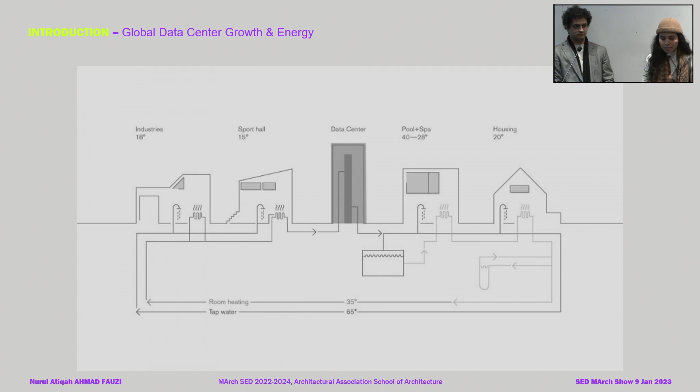Despite these demands and energy concerns, some data centers have a good relationship with their cities. They make up for their huge energy appetite by channeling their residual heat to neighboring buildings. So this is exemplified by this diagram by Norwegian architect Snohetta for one of their data center projects. So Amsterdam also has a symbiotic relationship with their data centers. However, heat demand from the city cannot always be met by the low supply of residual heat from data centers in winter. So we go into my research agenda.

So the entire research is centered around this data center, the Equinix AM4. I'll be calling it AM4 from now on, by Benthem Crouwel Architects. It is one of the most celebrated data centers in the world, despite adopting the shape of the prevailing box typology. It also challenges the idea of data centers being invisible, as infrastructures tend to be. This windowless behemoth has succeeded in gaining acceptance in its city. However, like other buildings, it is subject to obsolescence.

So enter the quantum computer. Based on numerous articles, once fully developed and ready for the market, current data centers will not be able to cater to the needs of the quantum computer, which runs at a temperature of absolute zero, which is minus 273 degrees Celsius. So this advancement will render AM4 and other data centers alike obsolete in about 30 years' time. So this is the future scenario that I've adopted for this dissertation.

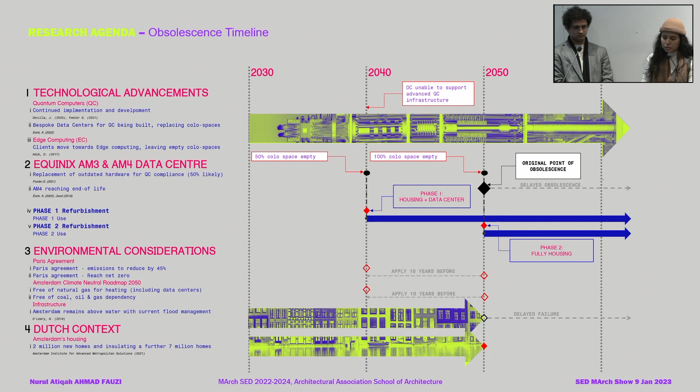So this obsolescence timeline, I call it, aids in shaping my research objectives, particularly concerning the proposition of alternative uses for the data center as it becomes obsolete. This dissertation aims to propose a second life for the sophisticated 21st century data center, aligning with the 2050 European timeline for climate goals and social and economic targets. So leveraging the abundant materials found in data centers, this study navigates the tenets of circular economy to plan the repurposing of the modern ruins as the era of quantum computers begins.

This study assumes a scenario by 2040 where half of the building becomes vacant due to functional obsolescence. Now, Amsterdam's housing crisis necessitates the swift utilization of available space, with data centers emerging as potential solutions for new homes. So AM4 is regarded here in the study as a material bank, housing reusable materials set for disassembly and reassembly elsewhere. In preparation for phase 2, remaining spaces are repurposed into material storage rooms or even a small-scale production yard. No materials leave the site, aligning with the intention to fully utilize AM4's many building elements.

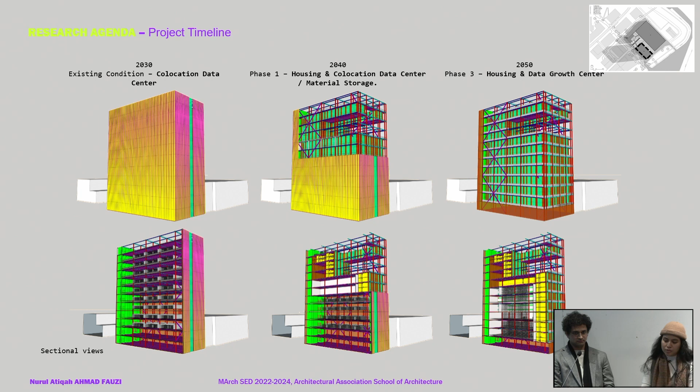Due to its depth, which is about 30 meters, it is not practical for the housing program to take over the entire depth of AM4. However, the residual space holds potential for indoor urban farming and a research lab, which don't require daylight, like its previous server occupants. Incorporating the data farm program not only ensures AM4's continuity as a data center, effectively delaying its obsolescence, but also acts as a contemplative reflection on its historical significance.

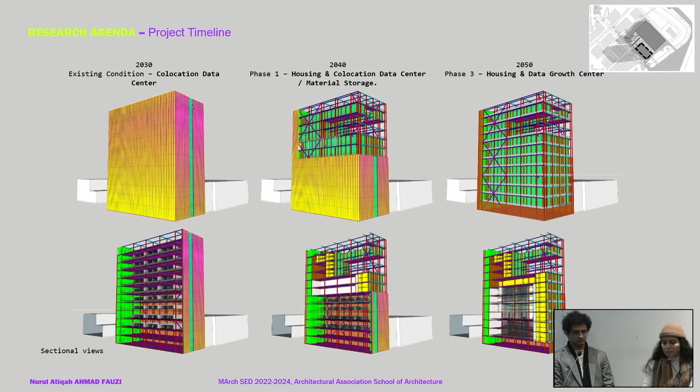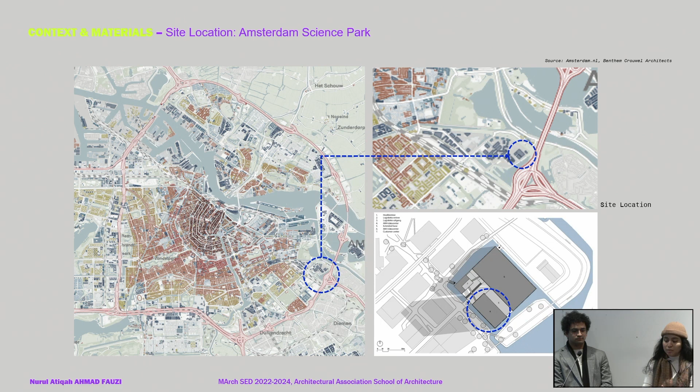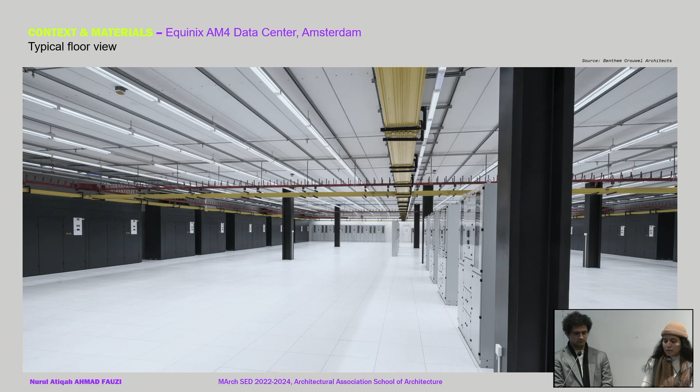So just quickly, AM4 is located in the University of Amsterdam Science Park campus, which is at the fringe of the city. So the staff and the students of the university are the ones who are expected to support the future functions of this retrofit. So this is just a view of the building in its context. It is the tallest building around, so it's not being overshadowed by anything. And much like most data centers, the floor-to-floor height is quite generous. Each floor is 6 meters high and currently houses data servers. And this is just a typical view of really any data center around the world.

So for the purpose of the study, it is important that we establish similar architectural characteristics of data centers worldwide, including materials. The materials chosen to be studied are generally used in data centers and have a lifespan longer than the building's use. So in theory, if the data center in Amsterdam can be fully refurbished into housing using its own skin and bones, other similar data centers can do the same. So the other aspect to take into account is each component's ability to be disassembled easily and reassembled elsewhere.

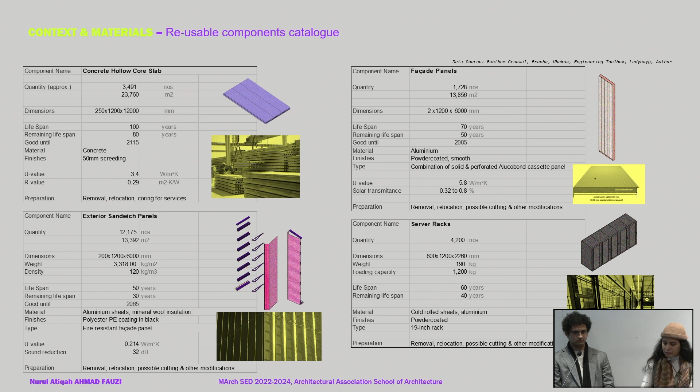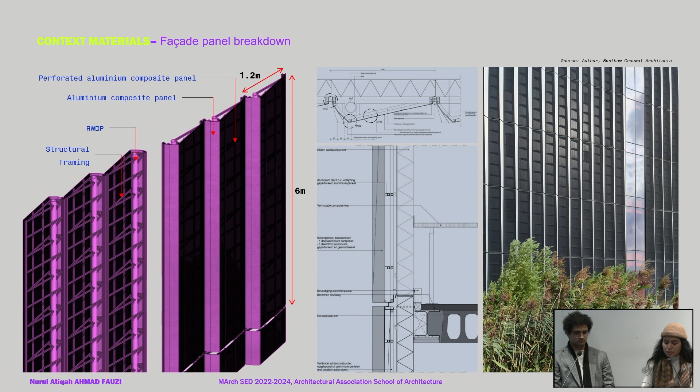This is just one of the few more detailed studies about each material that I've done. So this is an example of the facade panels, which are later utilized as wind barriers and also some sort of shading device for summer.

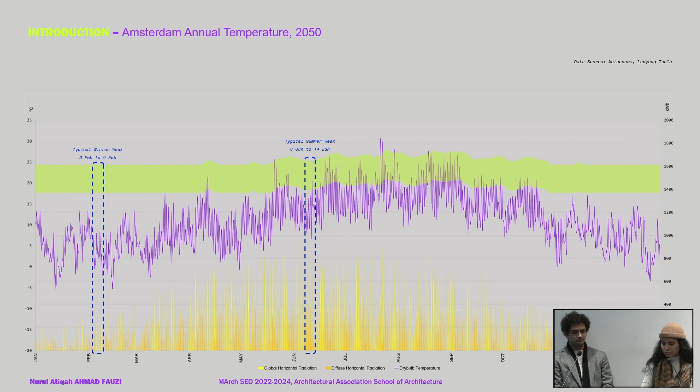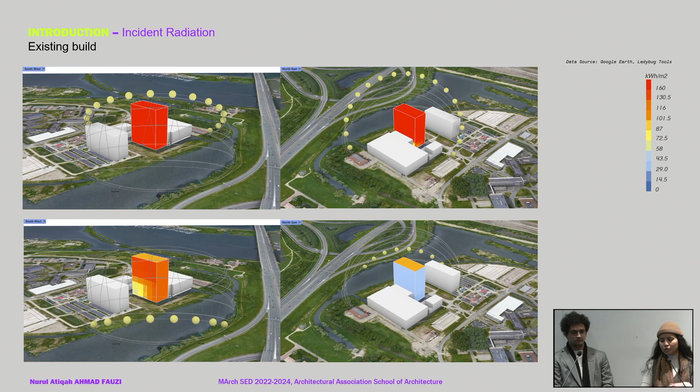So, environmental context. Amsterdam's climate is pretty similar to the UK, with much cooler winters. The southerly facade of AM4 gets more sun, while the northeastern facade and northwestern core receive very little sun in winter. All facades are well exposed to the sun in summer months.

So, layout configuration. The first design task for me was to conceive a layout that works within the structural confines of AM4, and the base case design scheme was, in my opinion, the most obvious route to take. Housing units would line the perimeter of the building with generous windows and depths not exceeding 8 meters. So this is essentially apartments with single aspect units.

The central space would still house AM4's data while it goes through decommissioning and acts as a material storage or assembly warehouse before the final phase. Then the design took a turn where it investigated the possibilities of not being a compact and enclosed building, but instead an open building, allowing more light into the center for the first time in the building's life.

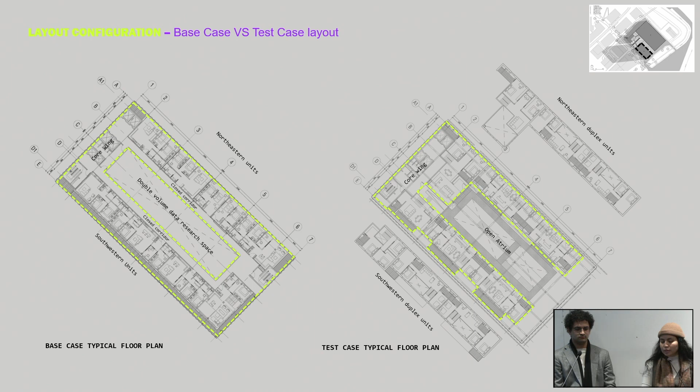This decision would, of course, have obvious impacts on the thermal performance. Compact and closed buildings are always better for heating dominant climates, but I wanted to investigate what would happen if I would propose much better open spaces for the users.

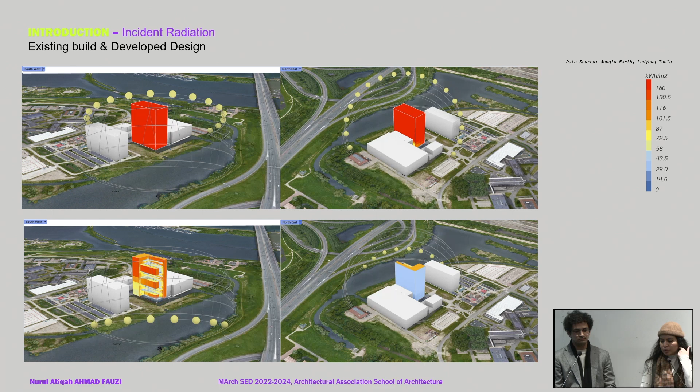So prior to the plans, the design was tested for its solar exposure, and some amount of volume is taken out on the southern side. This development of design also allows for double aspect units and would potentially help the units on the northern side to get more solar exposure.

Just a quick study on housing. These are a few diagrams called housing biographies that trace a person's personal space throughout their lifetime. To summarize, the older a person gets, the more personal space they have. And with scarcity of space in Amsterdam with the housing crisis, it's something that we should consider. Also, the Dutch government intends to rehouse the elderly into smaller spaces to make room for growing families.

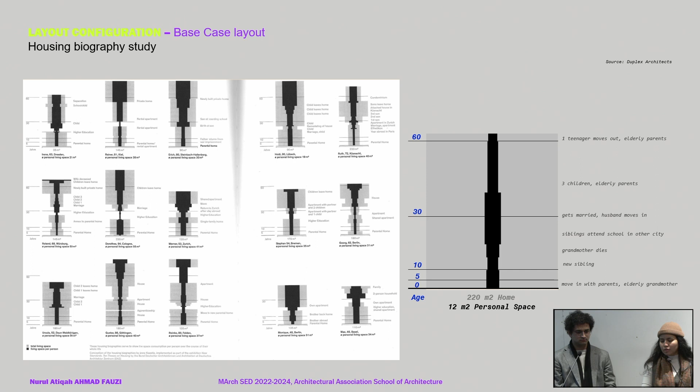So keeping this issue in mind, I've proposed a generational unit to keep future families together and provide the Dutch with bigger future-proof spaces. For the residential units, there is a mix of single-aspect duplex and single-volume units.

Later in the simulations, 2 spaces are tested for environmental performance: the single-volume bedroom, which is only 3 meters high, and the generous 6-meter-high living kitchen. It is essentially a test to compare volume spaces rather than individual units, as we're dealing with the standardized floor-to-floor height used in most data centers.

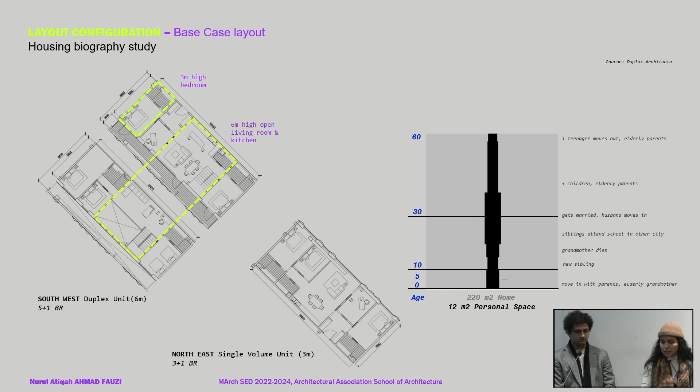The lighting and wind. So just quickly, as expected, a double aspect layout would allow more daylight to enter its units, but winter overcast skies generally keep indoor illuminance levels at a minimum. A quick study prior to this showed that units with a generous window-to-wall ratio, about 40%, perform better in winter, and that is the ratio being used for this study.

Just a quick section showing the spatial arrangement of the open-air atrium and units, as earlier shown. Summer months may provide a bit too much daylight than required, although through conversations with locals, it is always welcomed in Amsterdam. This is where the facade panels come in handy as operable shading devices for the southern units and potentially for northern units as well.

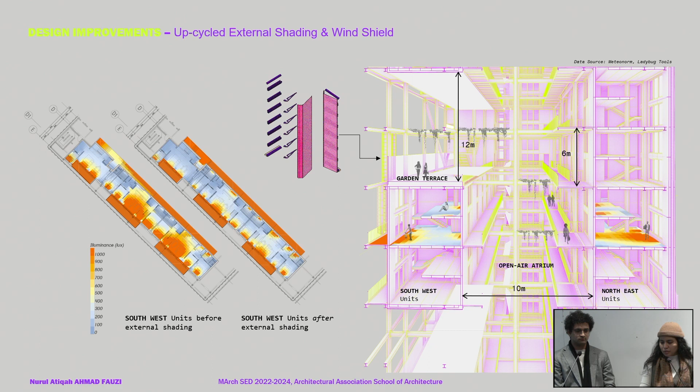Next, we address one of 3 garden terraces proposed in the design. Because the Netherlands is a windy country, opening up the building may increase discomfort levels. So, using the facade panels as not facade panels, putting up a wind barrier at the garden terrace would help create more comfortable conditions in the terraces. So it's reducing the 7.7 meters per second wind to a pleasant 3.5.

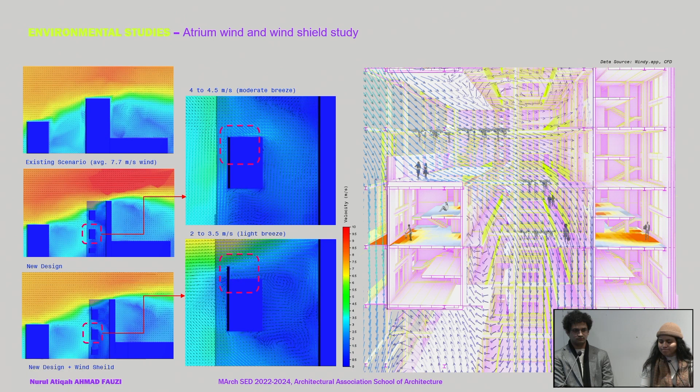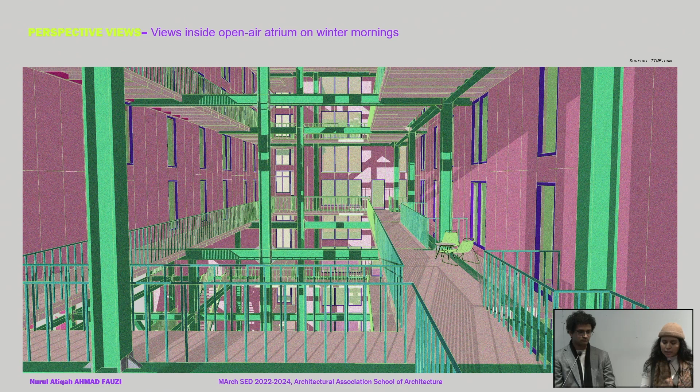So this is where we are at now, essentially what it looks like from the south. These are the southern balconies with the reused facade panels. Some views in the atrium. And these are views looking into the atrium, showing the units which are a bit more shaded. All these renders are actually during winter mornings. So, thermal studies.

So we start thermals with the base case with double glazed windows and existing sandwich panels. So these are the existing units that I am reusing without any additional materials to the existing fabric. A set point of 20 degrees is used since studies have shown that this is the most comfortable for the elderly, since we are proposing generational units.

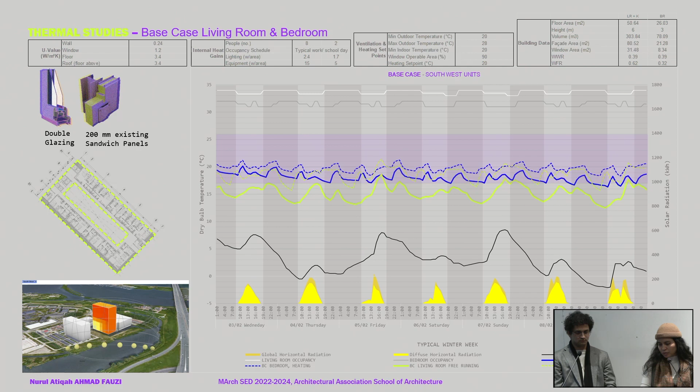In free running mode, it performs below the comfort band, but with a heating set point it climbs into the comfort band. The bedroom appears to be doing well without heating, attributed to its smaller volume. Then we go to the test case, where the building is more open, but with improved glazing and added insulation. And because we are opening up the building to provide better daylight and public spaces, additional materials are added so that it could at least match the performance of the base case.

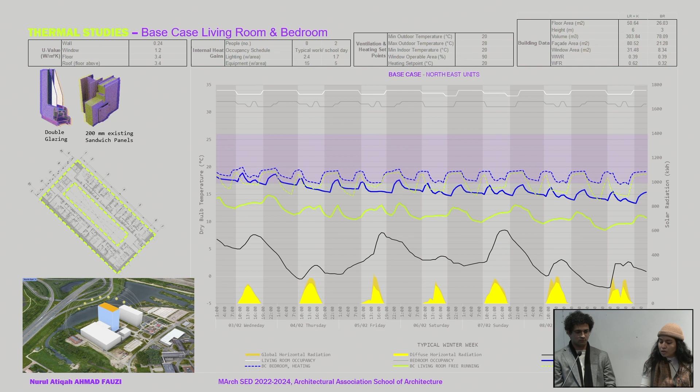So here we can see the living room is still in free running mode, still below the comfort band. So the northern units, I think, self-explanatory. Because it's in the north, it has less solar exposure, so it's not performing as well as the south. This is the same for the bedroom in the north units.

And then when we go to summer, there are periods of overheating in the living room. So these are tested in the southern units. But with the application of external shading, it performs close to a scenario where internal blinds are used. So with these strategies, temperatures in the summer can be kept within the comfort band.

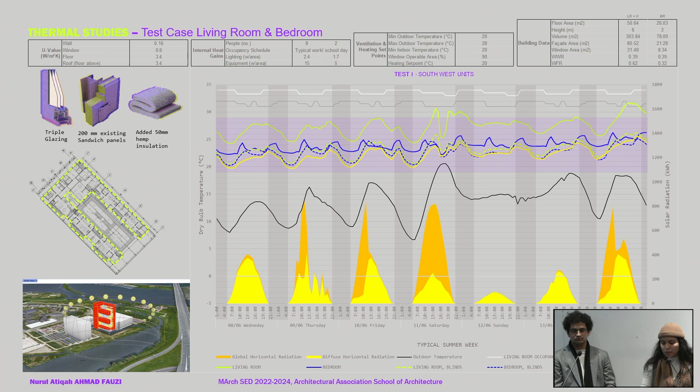So as a summary to my thermal study, at best, the large volume space performs best as a single aspect unit, but with certain strategies, a double aspect unit in a more open building can perform just as well. So all strategies are within the Dutch heating and cooling load requirements, which are a maximum of 25 kilowatt hours. So these two cases are more of options. It's not saying if the enclosed one is better or the opened one is better, but it's really just investigating what kind of layouts AM4 can cater in the future.

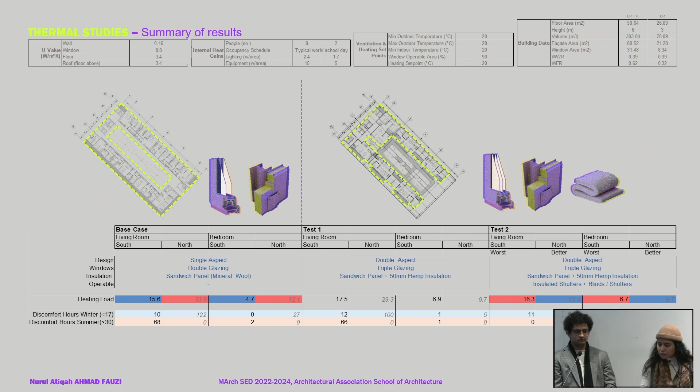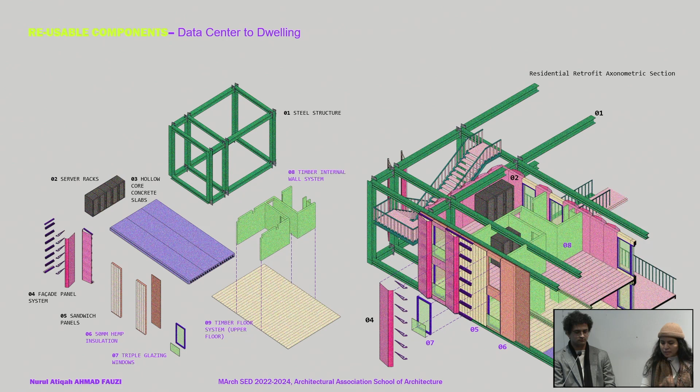Carbon studies. So after being more informed of the suitable materials through simulations, we go back to evaluating the selected components. So from the data center, certain materials have been chosen to be reused during retrofit. All the components are fully utilized somehow or other in the retrofit, but there is 30% excess of facade panels and hollow core slabs that are unused. The excess and additional materials are quantified for the following carbon studies.

So using the FCBS carbon tool, we are able to see how the new materials attribute to embodied carbon of the retrofit. If using the RIBA 2030 challenge, there's room to improve the embodied carbon. So I went back to fully utilizing the concrete slabs as floors instead of a timber floor system, just to see how it affects the embodied carbon distribution. And it has improved enough to get it within the 2030 range. So it's clear how we choose to use our materials affects carbon calculations.

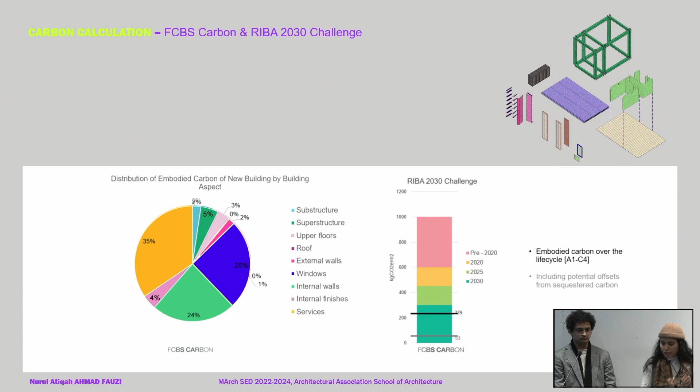And with the same design scheme, the FCBS tool tells us that we have to plant an equivalent of 90 football pitches worth of trees just to offset the whole life carbon values. And I leave you with a thought about how we can go shopping for construction materials in existing buildings. Thank you.

Right, good evening, everyone. My name is Abhilash Menon. The title of my thesis is Factory Reset, Adaptive Reuse of Textile Mills in Mumbai into Affordable Housing.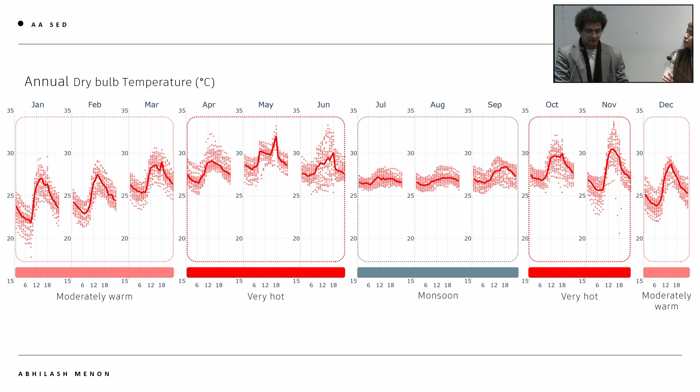So moving on to the climate analysis, Mumbai experiences tropical monsoon climate as per the Köppen-Geiger classification of climate. The annual temperature graph can be divided into three distinct categories: two very hot periods before and after the monsoon period, followed by a moderately warm period. On average, daily solar radiation is between 4.5 to 5 kilowatt hours per meter square. For the maximum daylight test, one would check for glare within the space, and the minimum daylight test would ensure a minimum of 150 lux for a residence.

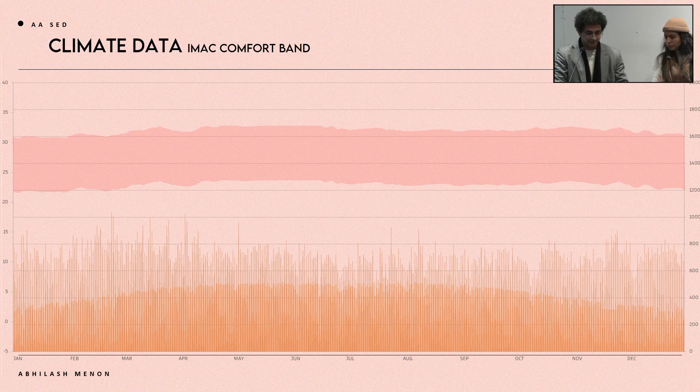So again, the climate band. For the purpose of my research, I will be using the IMAC comfort band, which was developed in CEPT Ahmedabad. They found that Fanger overpredicted the sensation of heat at temperatures found in warm climates in his PMV method, which is the basis for all comfort bands across the world. And the occupants in India were more adaptive at high temperatures, especially in naturally ventilated buildings. My three test periods are within that.

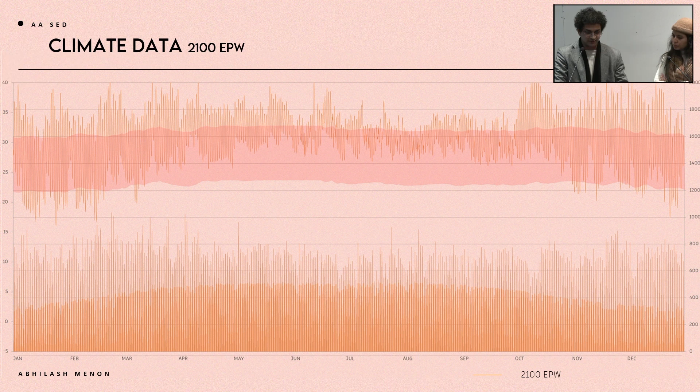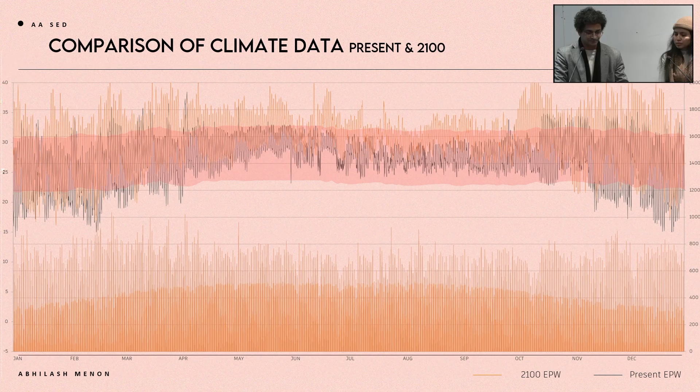And the IMAC tool also allows for calculation of comfort bands for future scenarios based on minimum, maximum, and mean temperatures. So that's how the temperatures would overlay between 2020 and 2100. The graph shows that the upper limit will not change beyond 32 degrees, but there is a prolonged period of 32 degrees as the upper limit in the comfort band.

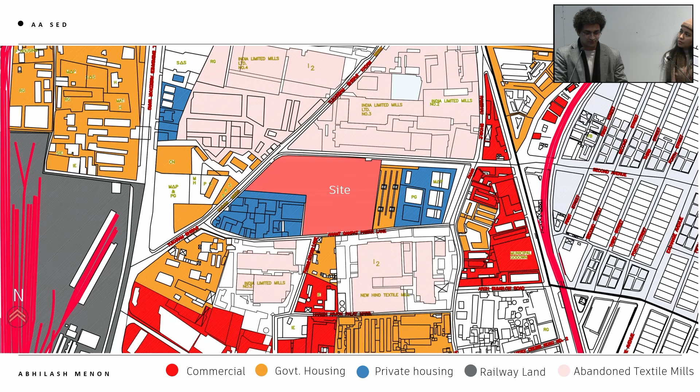Moving on to the site study. This is the area which, as I've said before, is in central Bombay. A land use map shows the surrounding context consists mainly of private housing to the west and east, along with some government housing. To the north and south, there are other abandoned textile mills as well. To the far west, railway land.

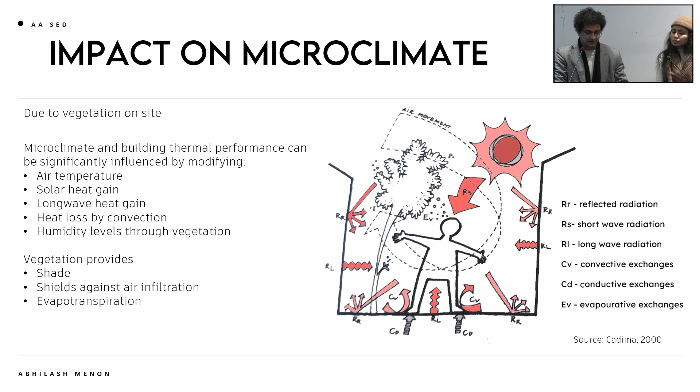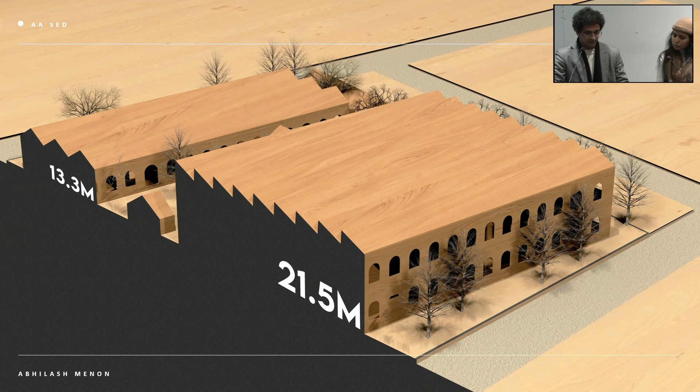So I made a block model consisting of the three main blocks along with the ancillary blocks. So this is how my site looks. And upon cutting a section, we can see the different roof profiles and heights of the main blocks. Moving on to project feasibility, various studies were done ranging from analysis on income groups across the city and housing data inventory to prove affordable housing is optimal for this particular site, but I'm not going to dive deeply into it at the moment.

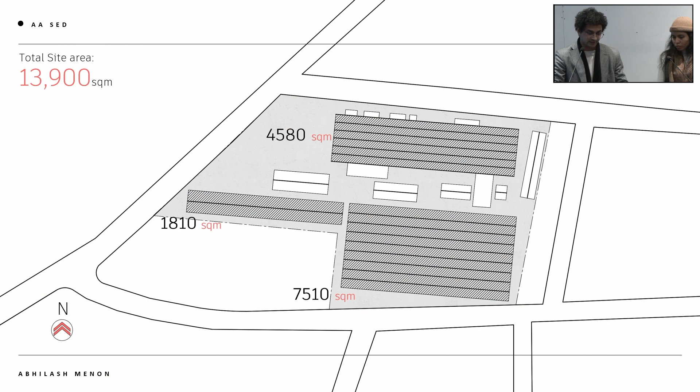We then put that distribution back into what we saw earlier, and we arrive at the number of 1, 2, and 3 bedroom units. However, after designing, the total built-up area obtained was 22,750 square meters, which equates to an FSI of 1.6. This then equates to a density of 300 units per hectare, or 900 people per hectare, which when compared to a typical high-rise of FSI 3 or 4 is far superior, as you can see.

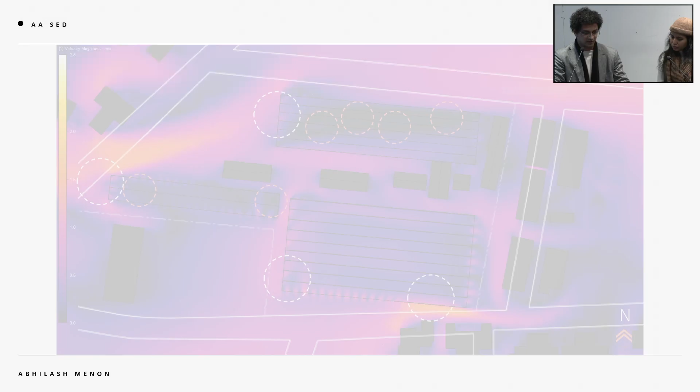Moving on to the climate analysis, the predominant wind directions are west, southwest, and northwest, with the average speed in summer of 3.1 meters per second used as the input for CFD simulations. Doing an analysis of the base case shows that the north block has way too many patches where the air is stagnant, and opening it up 50% in the roof profile, as shown in this section, shows a definite improvement.

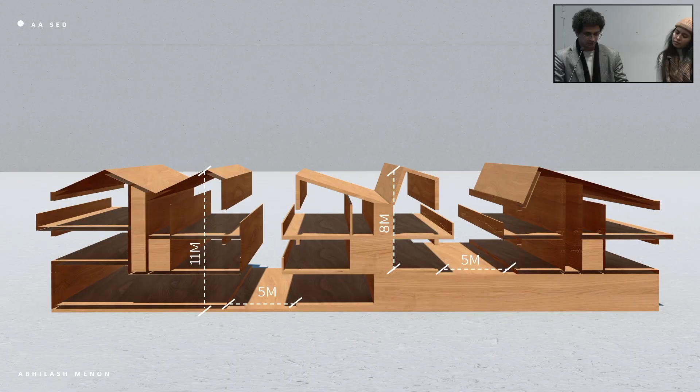So moving on to placing the blocks within them, the street to width ratio of the blocks was based on an observation from a case study in Porto. This is that said model wherein the street to width ratio was 1:2. And the CFD results from that case study, as shown here, show a minimum of 1 meter per second moving through the blocks, which is the minimum requirement for physiological cooling.

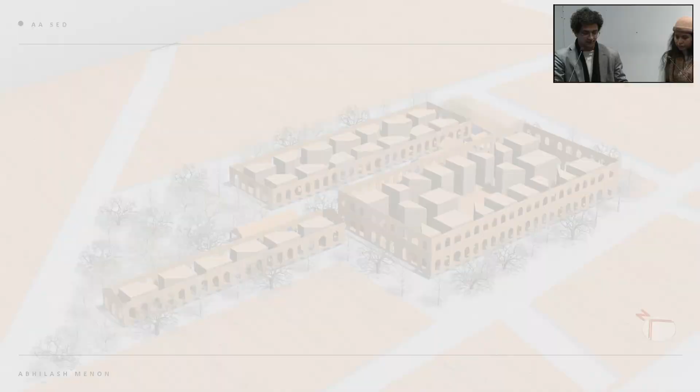I then tested that and 6 other blocks, which I'm not going to dive into, but the crux of it is that the north block was the one that was not getting the required levels of ventilation. Until finally I reached the final form, which basically has chamfered edges and a lot of gaps between the blocks to allow for free flowing of air through it. Lastly, the windows on the ground floor were brought to the sill level for better movement within the blocks.

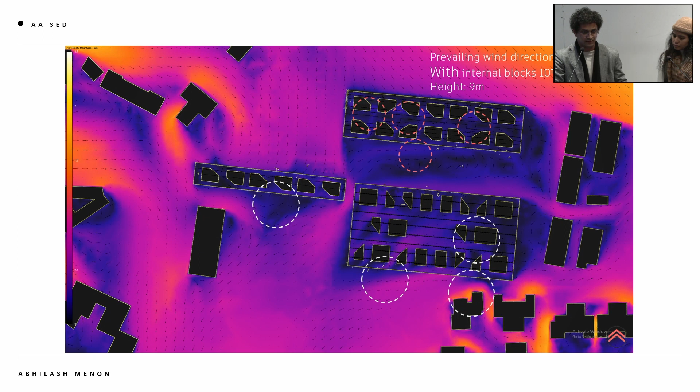And these are the final results, both on a cutting plane of 1 meter at ground level, as well as 9 meter for the highest stories. It must be noted that there was a 50% increase from 1 to 1.5 meters in doing so.

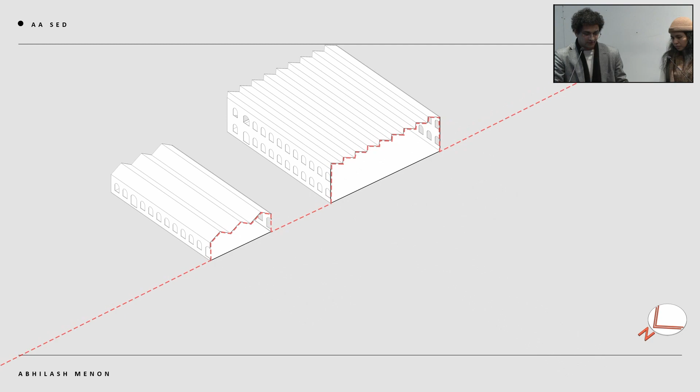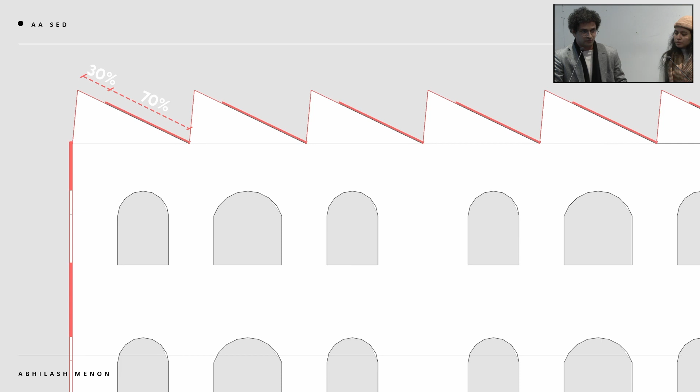Coming on to solar radiation studies, the base case is definitely going to be inadequate. Opening up the roof, as we saw earlier with CFD 50/50, proved to be too much, wherein it was almost 2/3 what the solar radiation would be outside, which is far too high when compared with the case studies. What I was aiming for was around 40% as per the findings from my case studies, which was finally this much, 25% of the outdoor solar radiation, which is the right amount for the required amount of light, as well as preventing overheating. Annual UDI levels, useful daylight illuminance, as well as daylight factor between 2 and 30%.

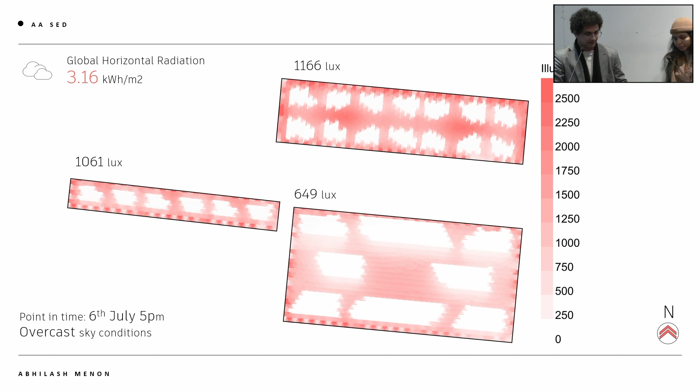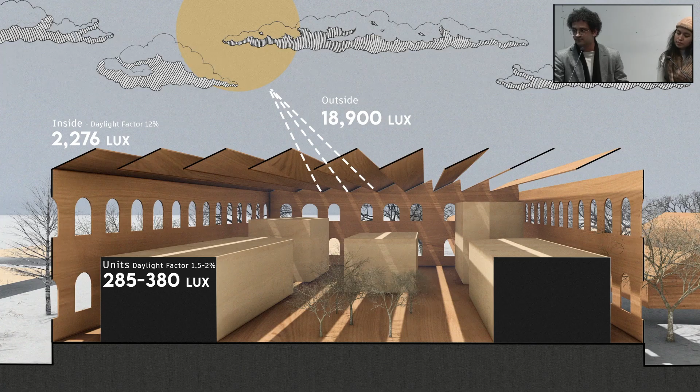So my test day was 6th of July, which was a monsoon day, and the 2 test times were 8 a.m. and 5 p.m., where the solar radiation is 3.16, which is very low, as mentioned earlier. And these were the lux levels within it. So basically, to summarize, midday on the worst, most cloudy day, if there's 18,900 lux outside, inside the existing structures that would be around 2,276, whereas the units need to be designed with a daylight factor of 1.5 to 2%, thereby allowing the required amount of lux hours for residents inside.

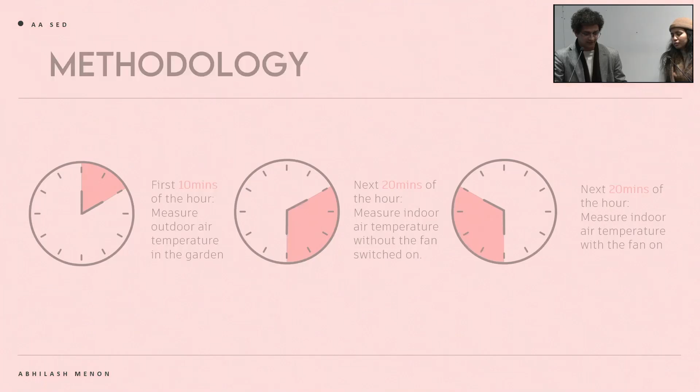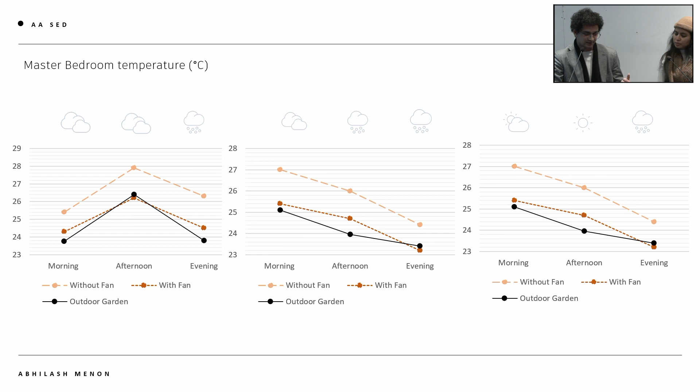Before moving further with the design, I'd like to highlight a research experiment I conducted during the summer break in Bangalore in India to study the effects of indoor comfort due to ceiling fans. A temperature measuring instrument was used to record the outdoor temperature and then the indoor temperature. And to summarize, with the fans on, the spaces have temperatures similar to that of outdoor conditions, showing a delta of 2 degrees Celsius compared to when the fan is off, and that will be factored into the final thermal simulation results.

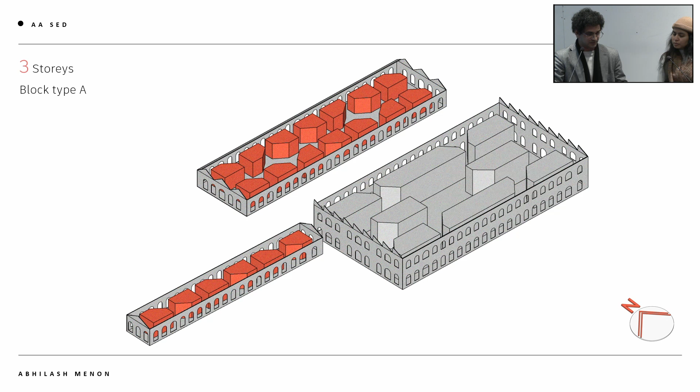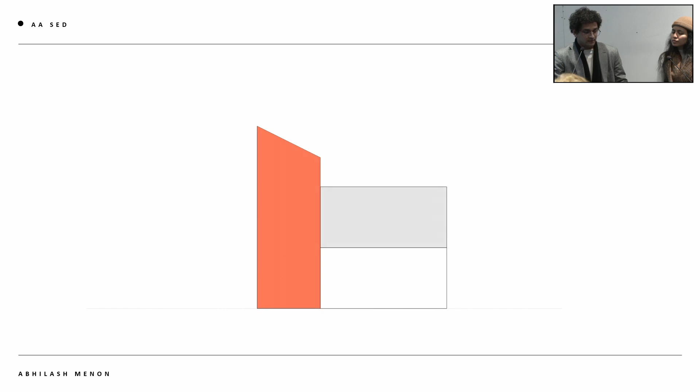Form development of the blocks. So the type A blocks are 3 stories high, and in the north and western block, following the principle of form follows ventilation, the units were designed to have a double height space on one side to assist with buoyancy and wind-driven ventilation through a stack effect. The inlets would be in the living spaces, and the hot air exits out through a smaller opening in the top of the double height space. Of course, there'd be an insect mesh as well, and this would also be a transition space for the bedrooms above.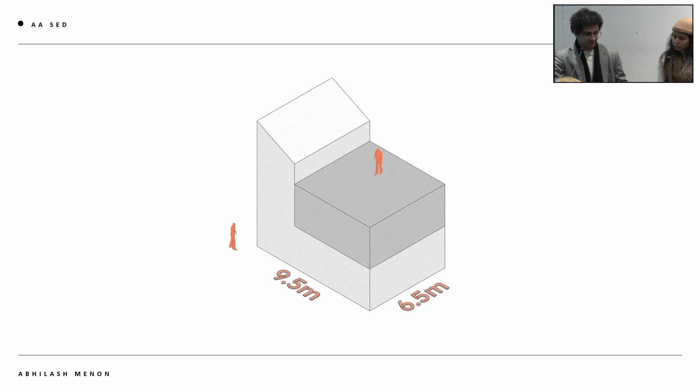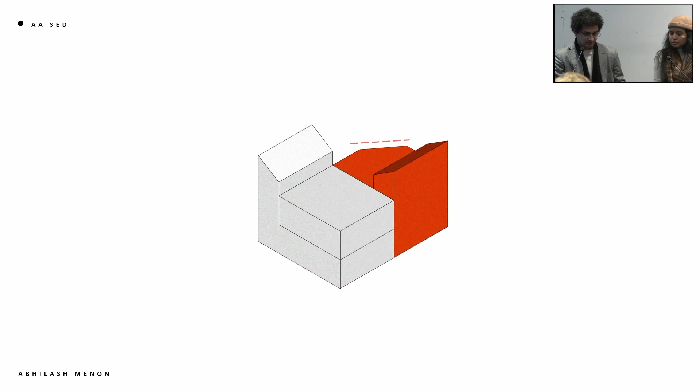So the basic size of the block would be 9.5 by 6.5 based on the areas for the units required. An additional unit attached in reverse with a shared wall. Chamfering the edge as per the form developed in CFD earlier, leading on to the final form with the 1-bedroom unit on top. This is what these units look like. They are also 1.5 meters sunken into the ground from site level. The living, dining room, and kitchen are open plan with the powder room downstairs, and the 2 bedrooms on top share a bathroom.

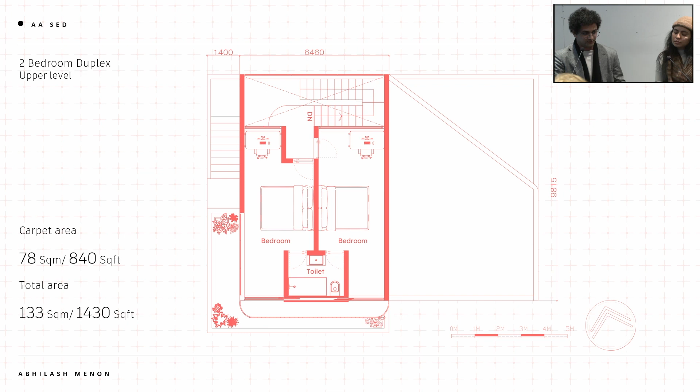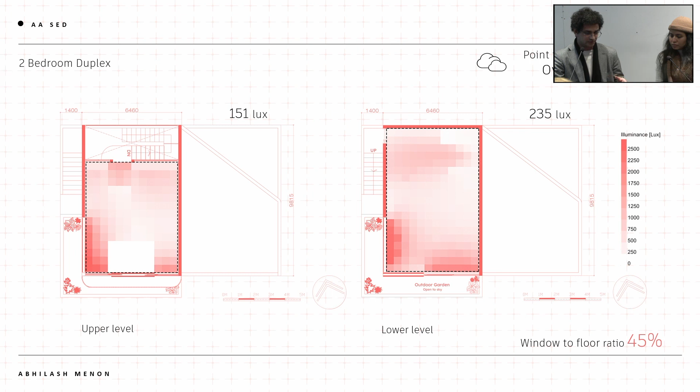The walls which have the window adjacent to them have a brick cavity. There's a brick cavity wall in which the windows slide 100% in to allow for maximum ventilation. The change in U value was factored in as well. Similar 1-bedroom mirrored, but with the chamfered edge, and the 1-bedroom unit on top. The input parameters for daylight, and I'm going to only show the results for the monsoon days.

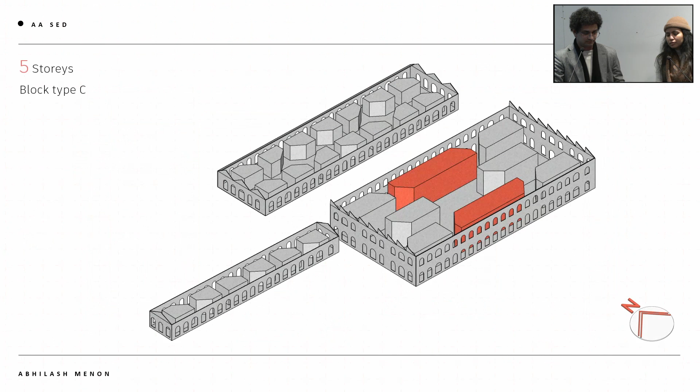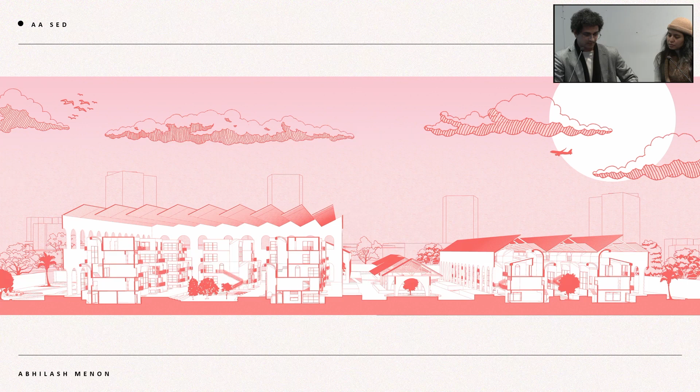This was the type C block, which again is just a variation, and the 3-bedroom unit, which is longer than, very similar to the 2-bedroom, but with a bedroom in the ground floor. And that leads on to the final form, which sort of looks like this. Then an isometric view of the site, and if we cut a section through the site, it would look like this. And the last block that I just showed you would look like this. So the bottommost has the 3-bedroom, above that the 2-bedroom, and the 1-bedroom units on top.

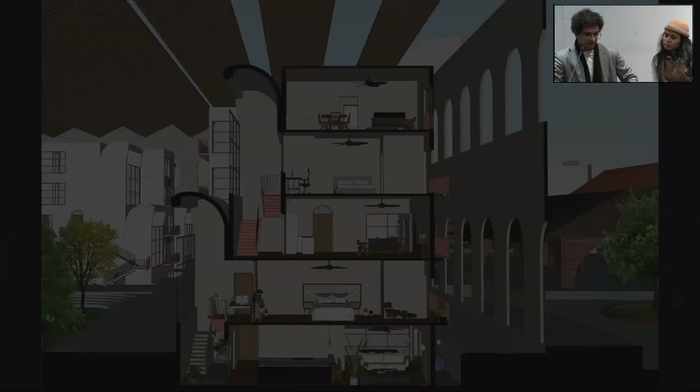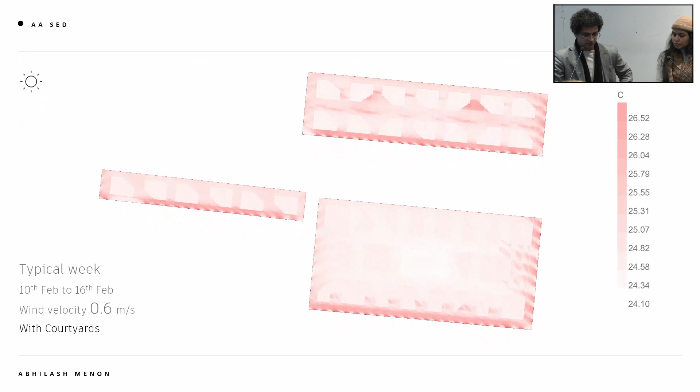And doing a CFD simulation justified the... The CFD results of the units were overlaid with the sectional drawing. This was based on the form alone and wind-driven ventilation. To test buoyancy-driven ventilation, I will have to simulate internal gains due to equipment, lighting, and occupants. Lastly, thermal comfort. Outdoor thermal comfort studies were done, and the temperatures were all within the IMAC comfort band.

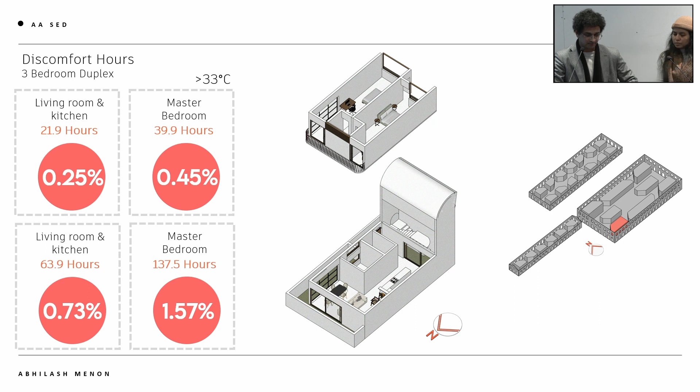These are the input parameters for my indoor study. A Grasshopper script was used to convert the infiltration rate from meters cubed per second per meter squared of the facade to air changes per hour. One simple way to visualize thermal comfort results is by just calculating discomfort hours, the number of hours for which the temperature is above 33 degrees in the year, which is the upper limit of my comfort band. The 3-bedroom performed the best, as seen here, due to it being on the semi-sunken ground level, with the typical week temperature graphs.

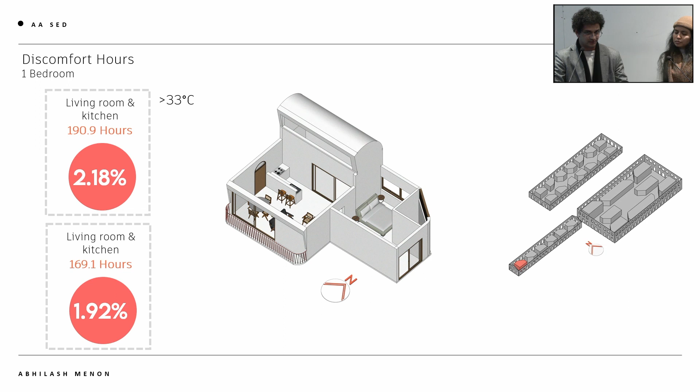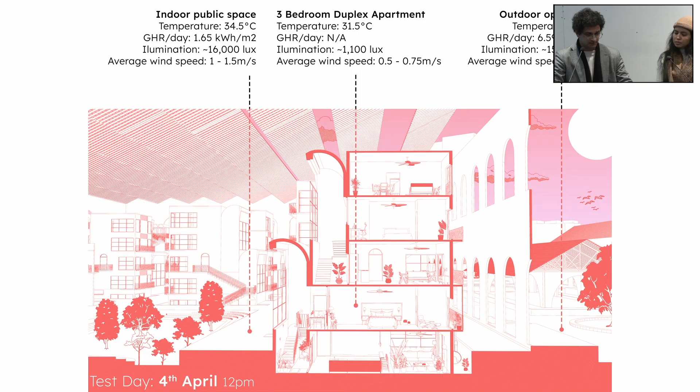This is the worst performing unit. It had exposure to the west, southwest, and northwest, and it had an average of 2% discomfort hours. I'm just going to quickly move on to the visualization. Thank you very much.

Well, thank you very much, both of you, for very well researched and very well presented projects. Ingrid, would you like to say something? These are 2 really impressive projects, and I think this course is a very challenging course because you are within an environment of a kind of explorative architecture that's going on in every corner of the school. And yet you're engaged with a degree of scientific rigor that is often absent. Sometimes you get a fantastic technical study in 5th year, but it's hard to apply this much data and still end up with an architecture. And I think for both of you in particular, this has been really successful.

I think with your project, there's something really beautiful that sun and wind have almost eroded this crazy building that looks literally like a hard drive that sits under your desk, but at the scale of a building. And then similarly, I think that there's a sense of place in your project here, which allows a kind of domestic vernacular to take form in this really unusual circumstance. And yet I'm completely overwhelmed by the data that you've produced. I suppose there's a question of the architectures that emerge if you had another year.

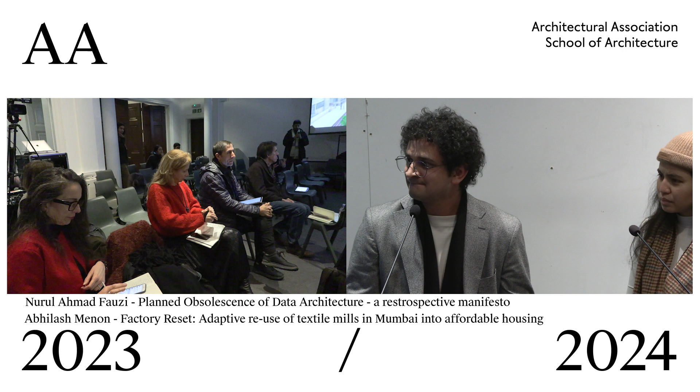I don't know, Abhilash. Yeah, well, on the contrary, mine was completely shaped by CFD simulations, as you could see. In the internal blocks, because of the arch shapes created by the stack effect, I think that does lead to an interesting form, but yes, there is scope for more exploration. I suppose the question is, do you want it? Does the software hold you back? Well, personally, I think the targets of what is comfortable would be holding us back mainly, rather than the software.

It's a pity you missed the first two presentations, which were very remarkable because of the way in which they put the analysis to the service of form, and form was produced, and it was interesting because it was not just form, it was an idea. From the numbers, something completely non-linear and fully grown.

So the others can hear you. Oh, sorry. Well, but that just failed. I mean, maybe we should bring them back for you to... It's okay. At some point I have to go. But maybe also, this isn't the only day we can see the work. I'm here every day. Good.

But it's really impressive. Thank you. And a real pleasure to see. It's a lot of information to assimilate, yeah, it is, and to still end up with a project that has architectural integrity. Congratulations. Thank you.

Yeah, well, I think it was a very interesting comparative, and I think fortunate that you show two kinds of retrofitting interventions on two building types that are quite paradigmatic. One from the past almost, or from the present, the manufacturing place, and the other is the data center, considering the obsolescence of a building type that is still emerging in a way.